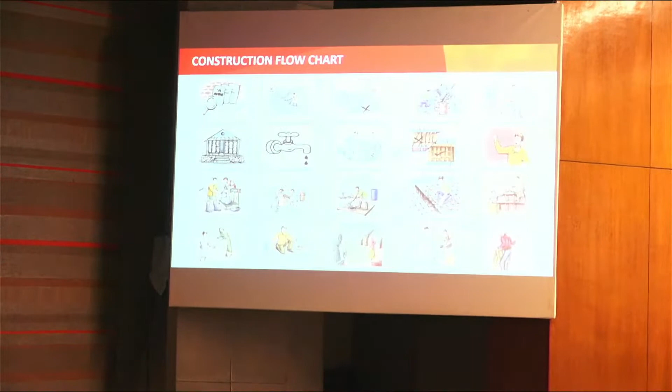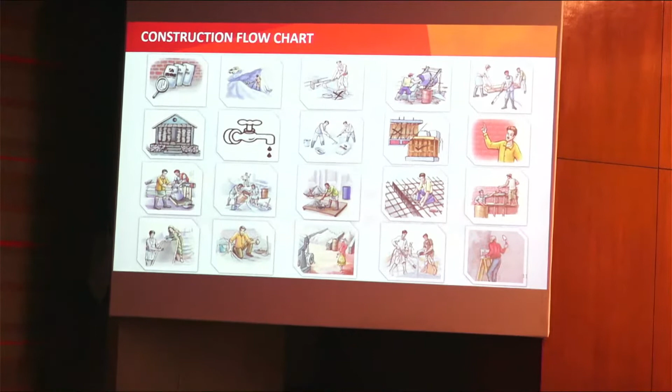So this is the site. Just think that everything is available at this site - cement, sand, aggregate, team, manpower, technology. So the whole construction flow chart is just added here, and now we will start with our good quality of concrete with our concrete materials. So what is the significance of our different concrete materials?

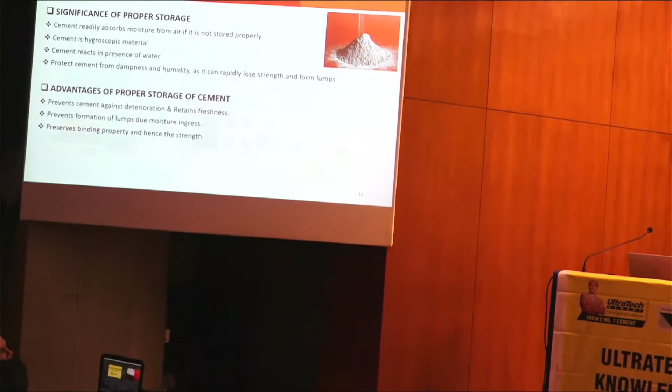So we will start with cement. We all know cement is a hygroscopic material. If it is in the air or not stored properly, moisture will be absorbed by the cement. It will create formation of lumps, it will lose its strength, and it will affect our quality of concrete.

So cement is the binder material. If the binder material is not okay, not good, then we cannot produce good quality concrete at our site. So there are advantages to storage of cement in a proper way, and there are so many things to take care of for storage at site.

Cement should not be stacked in contact with a wall or floor. It should always be 10 to 20 centimeters, or 4 to 8 inches, above the ground, so that moisture from the ground does not rise into the cement bags and keeps our cement fresh. Whether stacking cement above ground or in a godown, it should always be kept away from the wall. Always keep cement bags closely packed so that air circulation does not create lumps in the bags. So storage of cement is also very, very important.

We have talked about cement, which is a binding material. The second material is our aggregate. For concrete, 70 to 75% of the volume of concrete is captured by aggregate, in terms of coarse aggregate and fine aggregate.

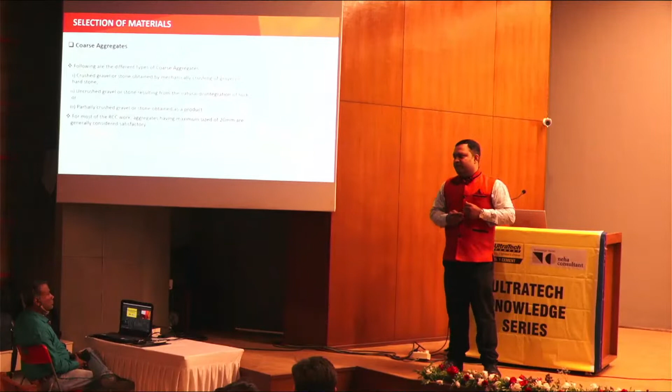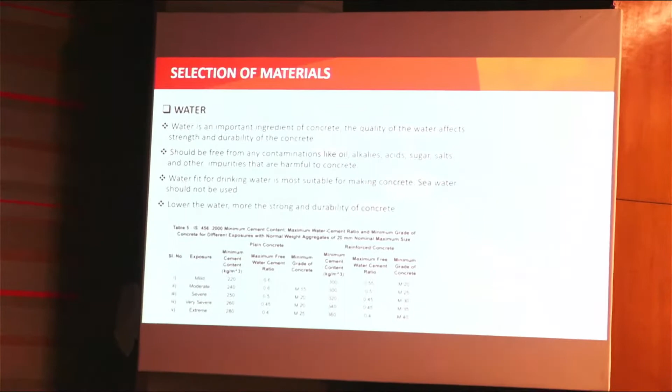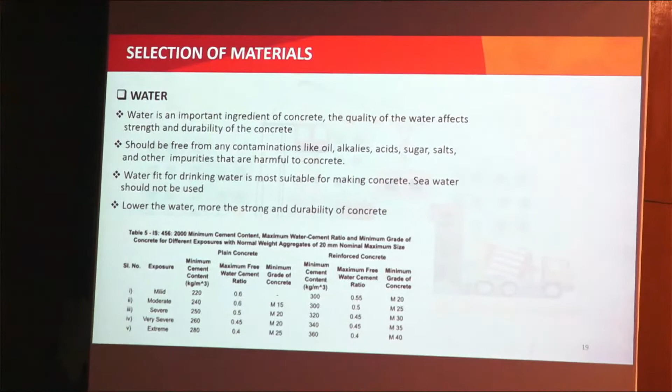How many of you have visited a site? Has anyone seen that the water is being measured before it is added? Then how can you produce good quality of concrete?

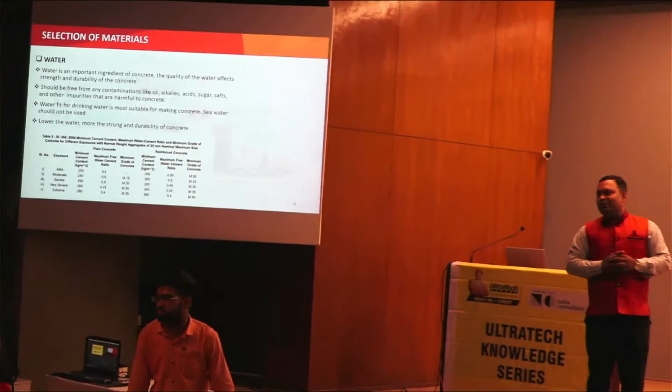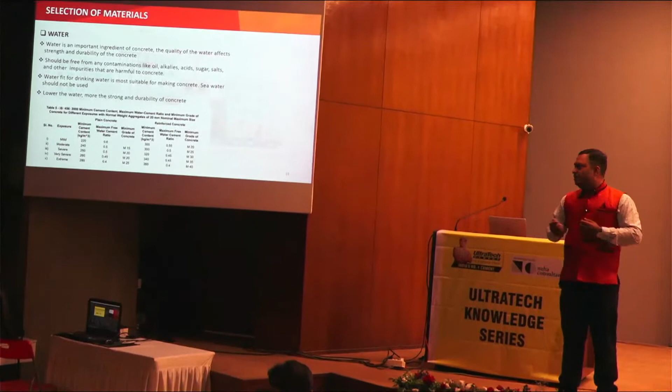This is our role also. When we are going to produce reinforced concrete, as per Indian standard, the minimum and maximum water to cement ratio is given, and we can use such water cement ratio in our construction practices. As per Indian standard, maximum we can have 0.55, that is 27.5 liters of water for one batch of concrete.

One batch means we are using one bag of cement. So for one batch of concrete, we can have 27.5 liters of water maximum.

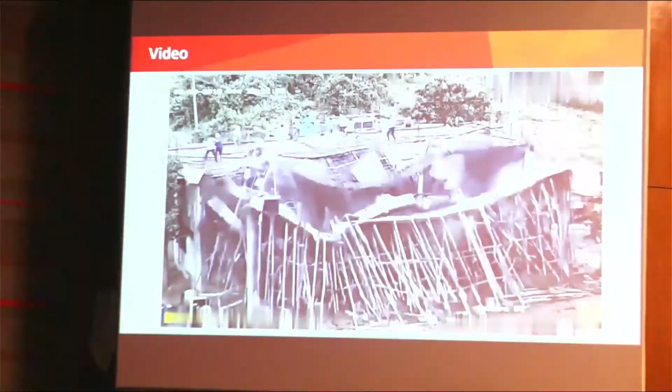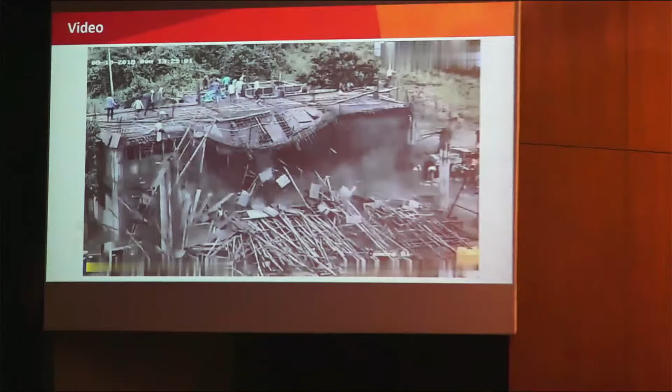So why did it happen? Do you think this is related to construction practices, or to the transportation of concrete, the placing of formwork, the use of ingredients, or the wheelbarrow going on at that slab? I think everyone might have seen this video somewhere, but for understanding and learning, I have captured this video and we will discuss it. We will watch it again and discuss.

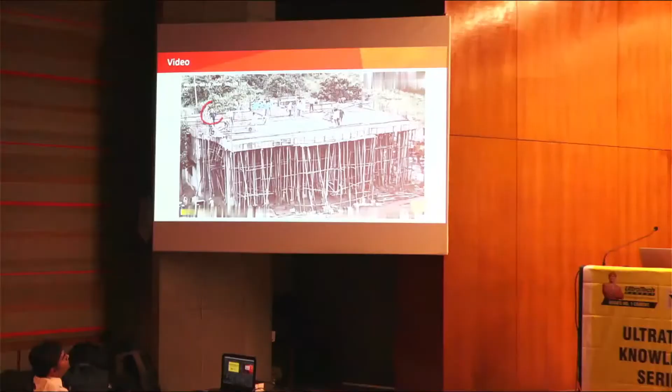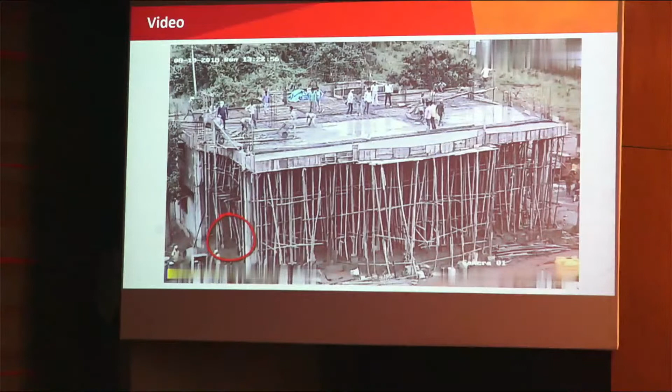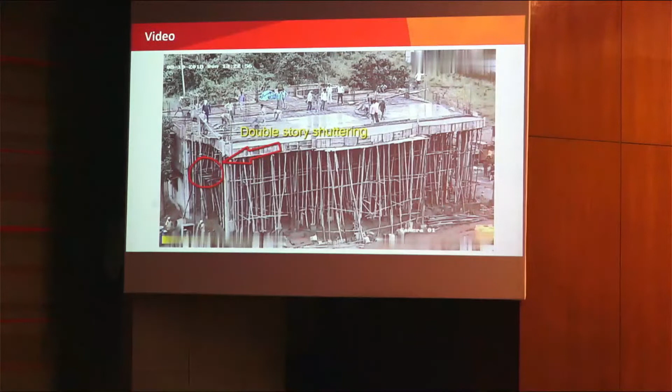Friends, different points here are very useful for us, so I have kept just this video. The accidental point is one, and the whole work follows from that one point. If you have good quality material and a good team, the proper formwork is also very, very important in such conditions.

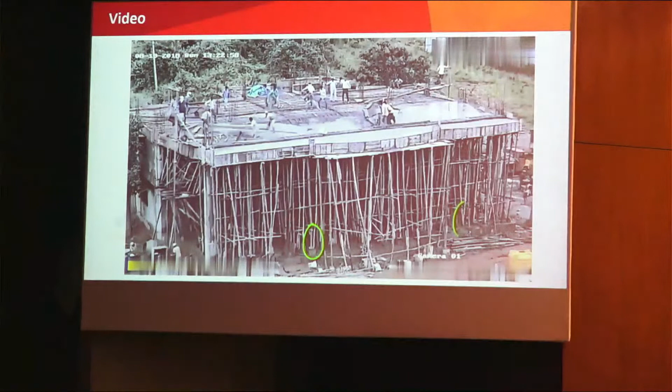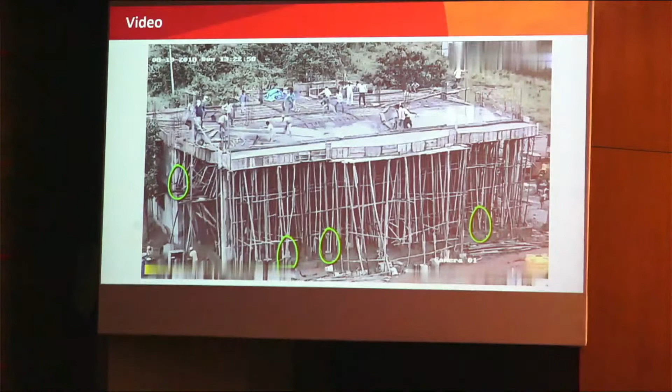For a double height, double story slab, proper formwork with wooden ballies are used. So whenever you are going to do such formwork or any type of formwork at site, good quality of formwork is also very, very important.

Steel formwork should always be kept vertical, and the formwork should be hard enough to bear the load of the slab, because when concrete is being placed, transportation happens via wheelbarrows, rail, or pumping, and the impact of the load is very high. So to resist such load, we require tightness and strength of formwork, which is very important at our site.

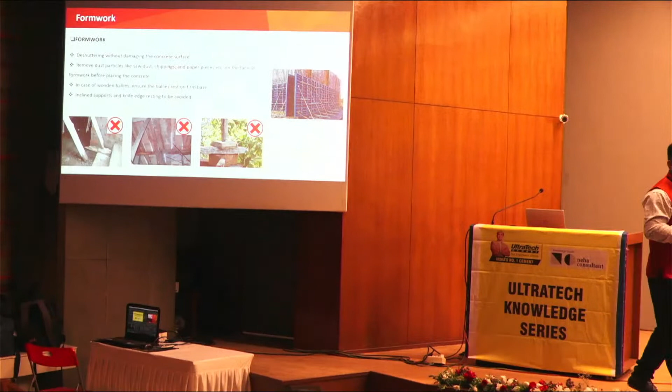For good construction practices nowadays, if you visit the western part of Mumbai, you will see aluminum formwork, Doka shuttering, and PERI shuttering being used for vertical construction, with the same formwork used throughout the whole construction work. Such formwork systems have been introduced so that the desired design material stays intact.

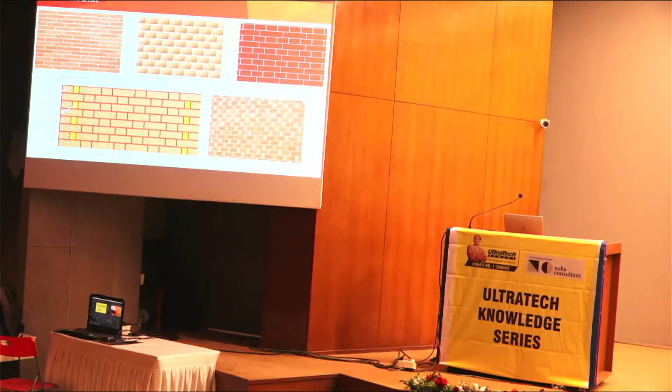No, friends, it's always masonry work. Some people use English bond and some people are used to Flemish bond. So it depends on the person. But as an engineer, we should always learn from the site which type of bond is executed there, and what mistakes have been done at site.

Because if you have visited a site, visit it again after 5 years. If the customer is known to you, revisit that site after 5 years. You will understand - at that time I visited this site, this was the construction practice being followed. But after 5 years, you will see some defects from practices at that time now showing up at site. So it will be very helpful for you to learn something from revisiting your site.

So there are different types of brickwork being used. Have you seen the rat trap bond? Have you heard of this - the rat trap bond?

It is not used as a load bearing wall, but for design, for cavity - the rat trap bond. The bricks are placed in terms of rowlock, on edge and flat.

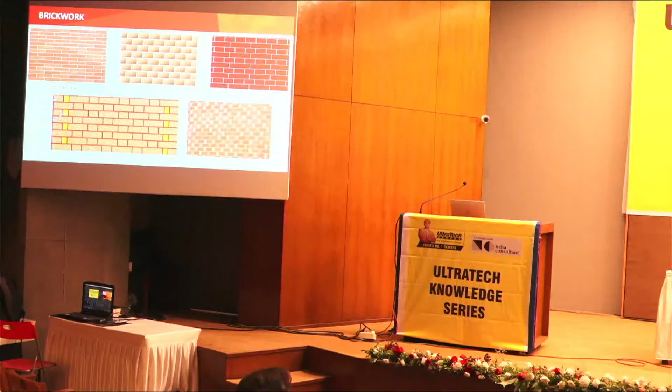We have to put that brick as a cutout brick, and two cutout bricks are placed there with a gap between them.